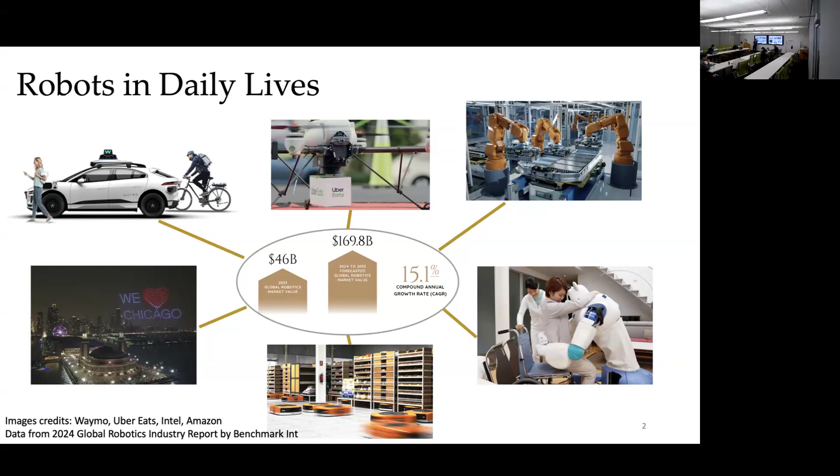And now with robots being increasingly integrated into both our lives and industries, we're really expecting high on responsible robotics, meaning the robots should not only do their jobs efficiently, but should also be capable of making decisions that are safe, reliable, and ethically sound. However, before achieving this grand goal, a critical challenge right now is how can we ensure robots stay safe at the very least in physical terms? After all, how can we trust a self-driving car if it's capable of leading us into danger, right?

And with incidents involving robot workers and autonomous systems on the rise, this has become an increasingly concerning issue. So action has been taken. Agencies like the Occupational Safety and Health Administration have issued guidelines on robot safety, emphasizing measurable and quantifiable robot safety standards. However, safety must not come at the cost of being overly conservative.

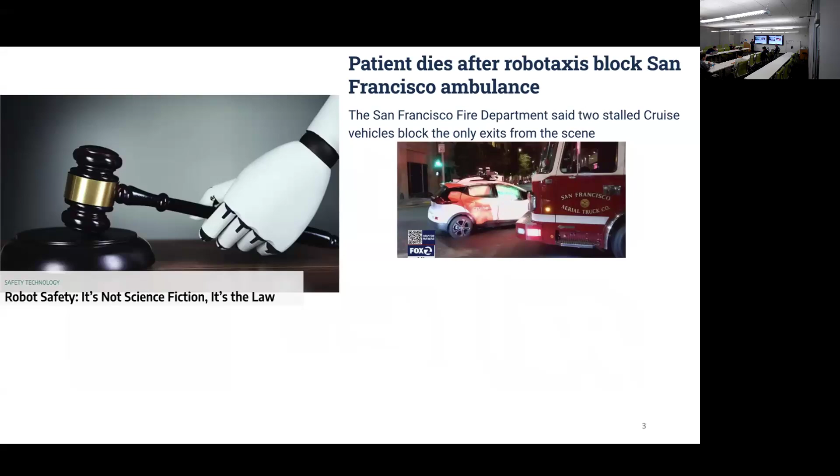So in August 2023, two autonomous vehicles blocked an ambulance from leaving the crash site, delaying the transport of the patient and tragically leading to their death. So this incident is telling us that robotic systems today are not fully equipped to handle these real-world complex situations where safety and flexibility must coexist. And what's even more concerning is that these incidents, although statistically rare, are already starting to cause public fear of robots, and people will stop using robots if this continues, no matter how innovative or efficient they become.

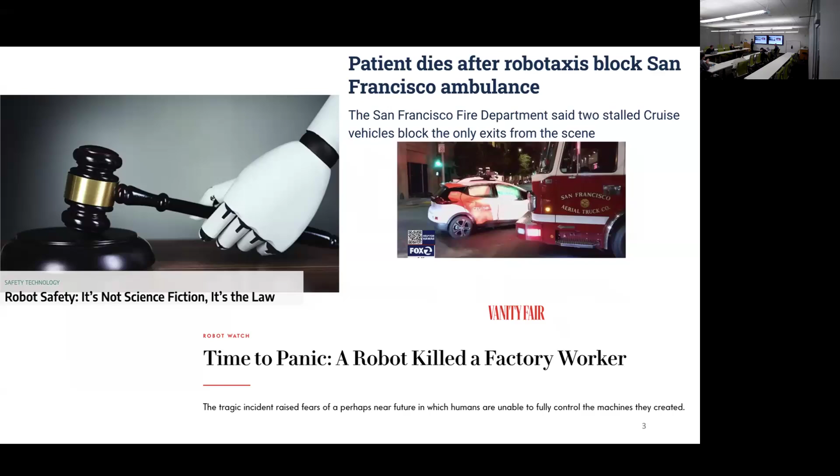So before we explain why it's so hard for safety and flexibility to coexist, let's first look at some challenges for robots to stay safe in this physical world. So in general, robots observe the environment and make predictions about how things will unfold in the future. And these predictions lead to specifications, for example, telling us how far the robot should keep itself away from the object. And then during this decision-making process, the robot will decide what actions to take, either individually or collaboratively with their human or robot teammates.

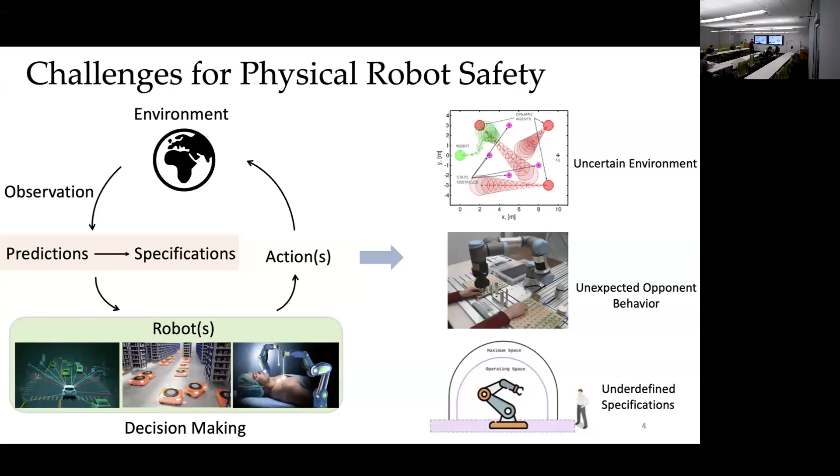So this process may seem straightforward, but when it comes to real-world applications, it's far more complicated, as robots may face potential sensor failures, unexpected changes in the environment, or unpredictable actions from other agents. So my research aims to address this grand challenge of physical robot safety. And I'll discuss how we can use methods from control theory, machine learning, and social science to investigate it from three different perspectives: the environments the robots operate in, the counterparts they're interacting with, and also the safety specifications they're following. And this brings us to the outline of today's talk.

So in the first chapter, we'll talk about functional safety, targeting robots operating in uncertain environments, especially if they're suffering from localization error or motion disturbance. And I'll present a control-theoretic framework that provides mathematical foundations for guaranteeing safety in a probabilistic setting. And more importantly, we want this to be done without having robots behave over-conservatively.

And second, building on top of this, together we'll explore the challenge of collaborative safety, where robots have to collaborate with their heterogeneous teammates in a decentralized setting. And I will show how we can use novel responsibility reasoning combined with control-theoretic methods to allow agents to make context-aware decisions that lead to group intelligence with formal safety assurance.

And then in the last chapter, on representational safety, we'll talk about how we can generalize these methods to unseen scenarios where the safety specifications are not known beforehand and have to be learned. For example, when a robot enters a new environment, how should it determine the best safety distance to follow? And I will discuss how we can blend data-driven learning with control-theoretic techniques to answer the question of how safe is safe, allowing robots to adapt and refine their constraints in real time.

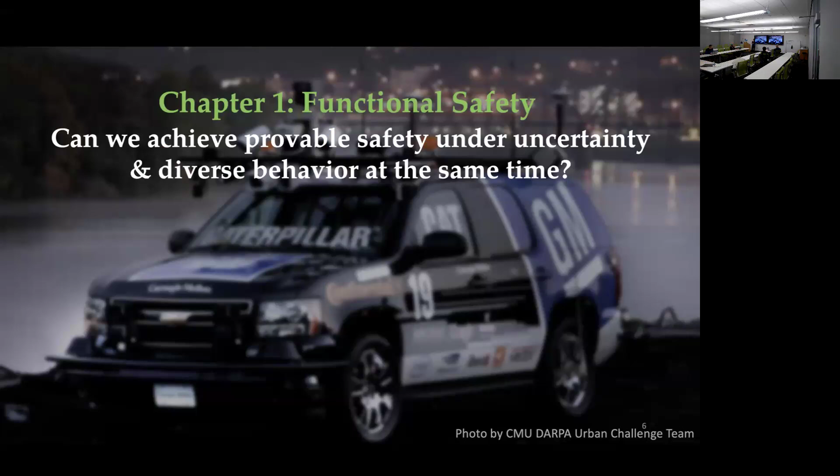So the general idea of safe control is that given a system model that tells us how the robot positions and the velocities are going to change if certain actions are taken, and also given safety specifications that tell us, for example, how far the robot should be away from others, right? And this describes which states are safe for the robot to stay in. Then we use control theory to select actions to keep the system in those safe states.

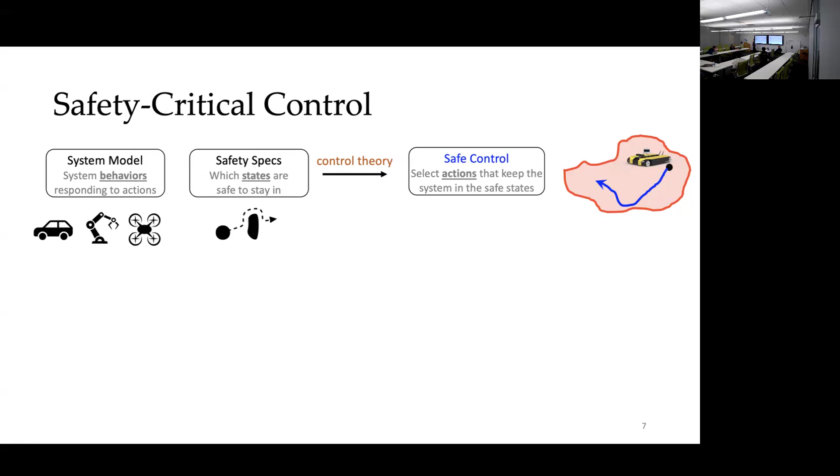And some common strategies to do that are partitioning the joint state space into small tessellations, or we can impose velocity constraints based on geometry and motion, or analyze all potential future states given robot dynamics. Is this the state space of only our robot, or a state space that includes the dynamics of the environment? This is a state of only robots. Okay.

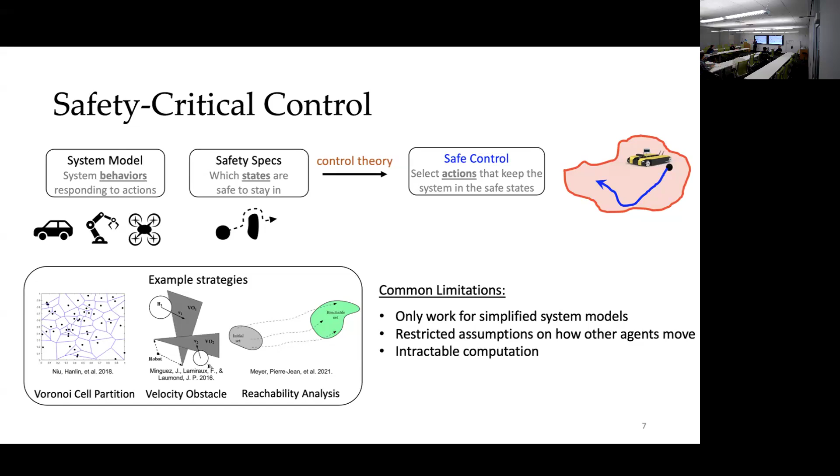However, these common strategies usually suffer from limitations, for example, difficulty in handling complex system dynamics, or over-reliance on restrictive assumptions about how others will move, or they could easily become computationally intensive at runtime. So at the same time, control barrier function has become a practical, popular solution due to its generality and ease of use. And here's an overview of how it works.

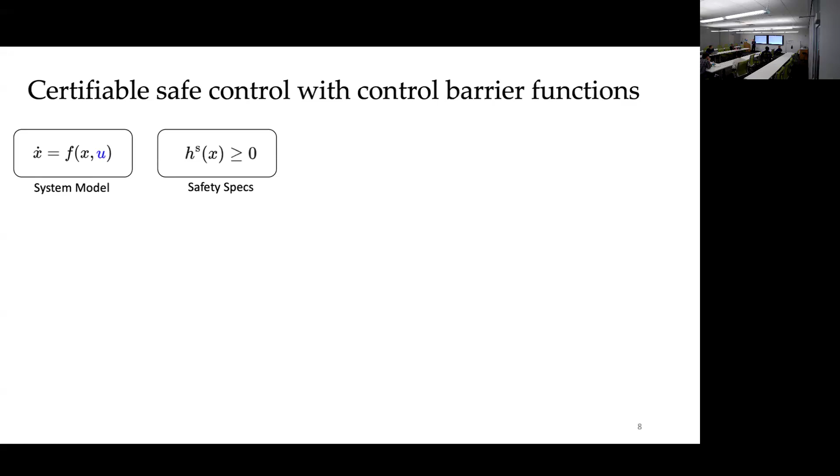So given a system model like this, where X represents the state of the robot, for example, the position where it is, right? And U is our control input to the robot, for example, the accelerations. Then control barrier function is essentially describing a set of states denoted by H(x) greater than or equal to 0, where the H function is characterizing how far the robot is away from the boundary of the safe set.

So just like in this illustration here, the red safety boundary is separating those safe states with positive H values from unsafe ones. And the control barrier function is essentially saying if the robot starts initially in this set, then it will always remain within the set. So how can this be done?

So we do this by imposing such a condition on robot motion to describe what kind of actions are actually allowed or acceptable based on how we would like this H function to change. And here we're strictly enforcing that the rate of change of this H function with respect to time has to be lower bounded by negative gamma H, where gamma is a positive behavior coefficient.

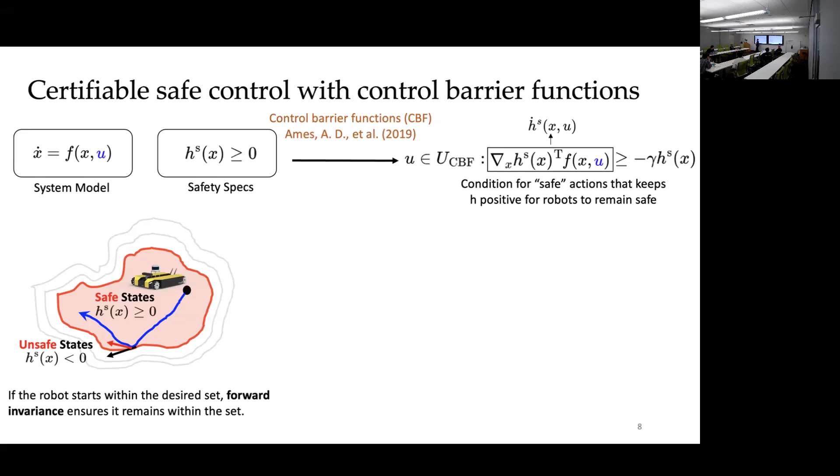Now, how is this related to provable guarantees? Let's look at this visualization here. So we have this blue line here describing how we would like this H function to evolve over time. And at the same time, we have this green line. It is an exponential function serving as our baseline function.

So the key idea here is as long as we can make sure the decaying rate of this blue line is not faster than this green line, the blue line will always stay above and therefore keep the positive value for the H function. Correspondingly, the robot will always stay within this safe set. So we can see CBF is quite a powerful tool as it can translate our safety requirement from the state space into a constraint in the robot action space. So that's why people use CBF a lot to get these provable guarantees.

However, it also has some limitations. The first one is that it often assumes perfect system models, system dynamics. So what would happen if uncertainty, for example, unbounded motion noise, is introduced? Can we robustly account for these uncertainties while still preserving these provable guarantees?

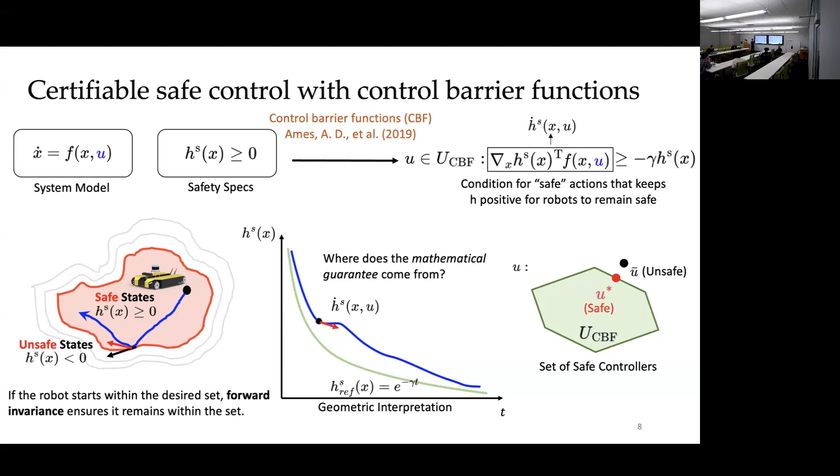And second, think about the cases where the robots are blocking the road due to their limited behavior characterization, right? So the question here is, can we make the safety analysis adaptive so that we can maximize the robot flexibility in motion when it comes to near-accident situations, right? So they don't have to behave overly conservatively.

So to address these two challenges, we propose to extend the conventional CBF into a probabilistic setting. Let's take this ramp merging as an example, where our ego vehicle needs to safely and efficiently merge with this human-driven car here.

And instead of having a deterministic model, now we are having a stochastic one with this additional term d capturing the uncertainty modeled as Gaussian motion noise. And on the upper right, we have this loosely defined probabilistic CBF safety condition. And unlike those traditional CBFs that rely on a fixed behavior parameter gamma, we are formulating it as a bi-level optimization problem where the robot control as well as the behavior parameter gamma are being involved.

Now you may wonder, why do we want to do that, right? How can this help us to address those two challenges we mentioned earlier? So recall the exponential functions we mentioned earlier. The gamma value is essentially describing how fast a robot or system is allowed to approach the boundary of the safe set. So by taking different values of gamma, we are essentially choosing different exponential functions to bound our decaying rate of the H function here.

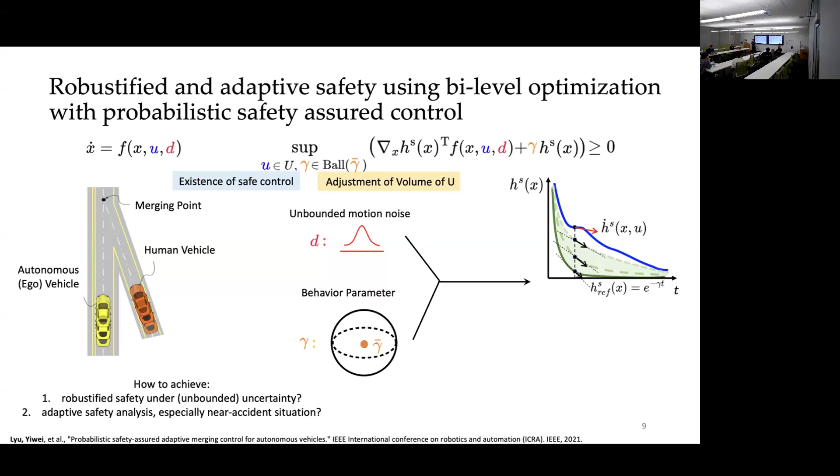And in the context of driving, this gamma can also be interpreted as driving styles. For example, whether a robot is typically a conservative driver or it is typically an aggressive driver. And our key insight here is when it comes to near accident situations, actions that do not follow your typical driving styles may be needed.

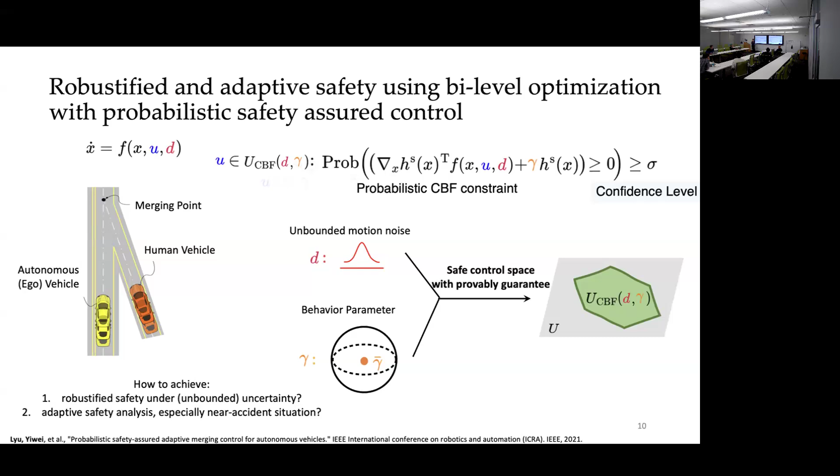And here is our formalized representation of this probabilistic CBF constraint, stating that this condition has to be met with at least probability of sigma. And this kind of formulation allows the robot to robustly account for uncertainties while dynamically adjusting its driving behavior style to balance between safety and flexibility.

And traditionally, if we want to do that, we need to specify very detailed goals. For example, which gap should the robot merge into? And after that, once you specify this goal, you will need to construct corresponding reward functions or use a high-level planner to do that. Now, with our approach, these diverse behaviors naturally emerge from the same objective function. And this is because the safe control space for each robot is being automatically calibrated based on the different driving styles they are adopting. And these different behaviors align well with our real-world applications.

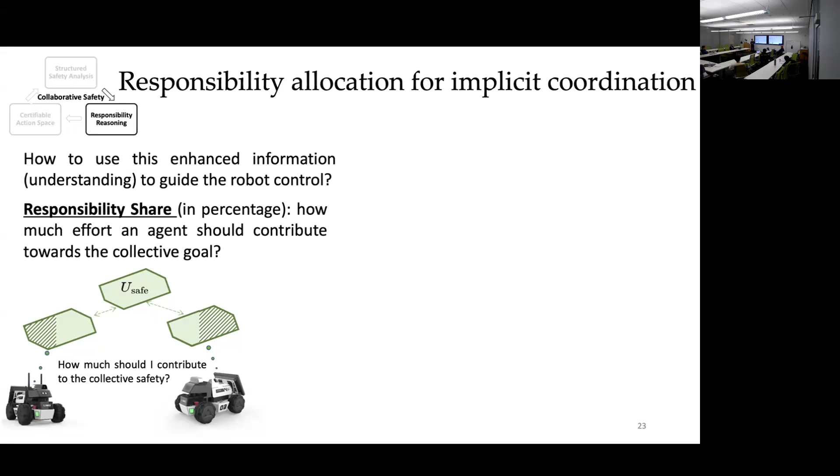So that's how the red agent decided to take on more responsibilities on its own. Now the question becomes, okay, we have these responsibility shares. Now how are we going to inform robot control, right?

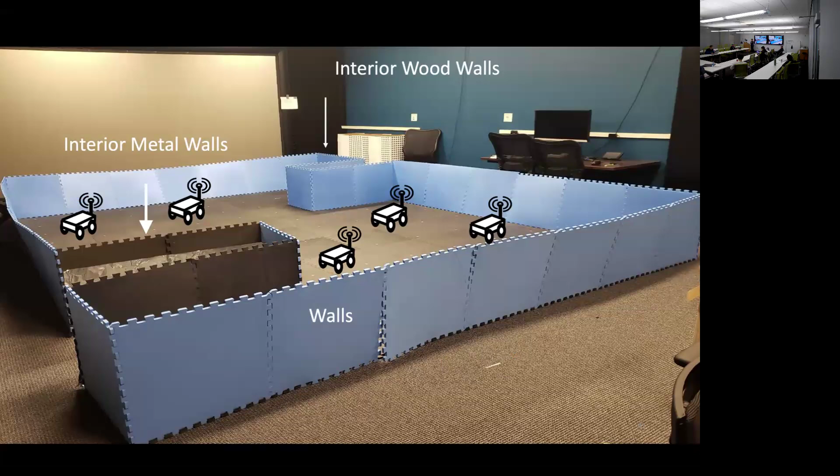So to answer these questions, we start from collecting some real-world data. This is how we resemble a typical indoor space. By using materials like foils and wooden boards, we are simulating the existence of interior metal walls and wood walls, which are common factors that can influence communication quality. On the right, we are looking at a visualization of how this communication quality could vary over space. This is measured by a metric called RSSI, received signal strength indicator, to quantify the Wi-Fi signal strength at different locations.

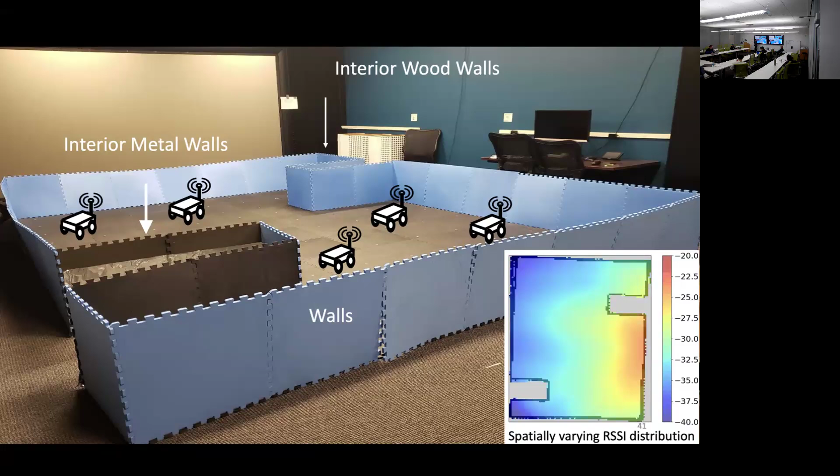Now, with this data, including robot positions as well as the measured signal strength, let's see how we can learn the constraints as well as their compositions from this data. So we start from building a predictive model using Gaussian process to estimate the communication quality around each robot. And then from this predictive model, we define a region with acceptable communication range, basically representing within this area, we can receive acceptable communication quality.

And then we formalize this region description through connectivity barrier certificate, which basically translates the communication requirement from the state space into robot control space. In other words, for this pairwise robot i and j, as long as we can find a joint control that falls within this part of this set, then this pairwise robot is guaranteed to stay connected.

Now, with connectivity barrier certificate serving as our pairwise and modularized constraint, our next question here is, in this mobile robot system, how should we determine which subset of the constraints to activate? And at the same time, we want to minimize the unnecessary constraints on robot motion so that they can complete their tasks efficiently. So we do this through graph-theoretic optimization, which can help us compose all these different pairwise constraints into a unified framework. And through this process, we can ensure that the robot team stays connected as a whole while maximizing their flexibility in motion to reach their target.

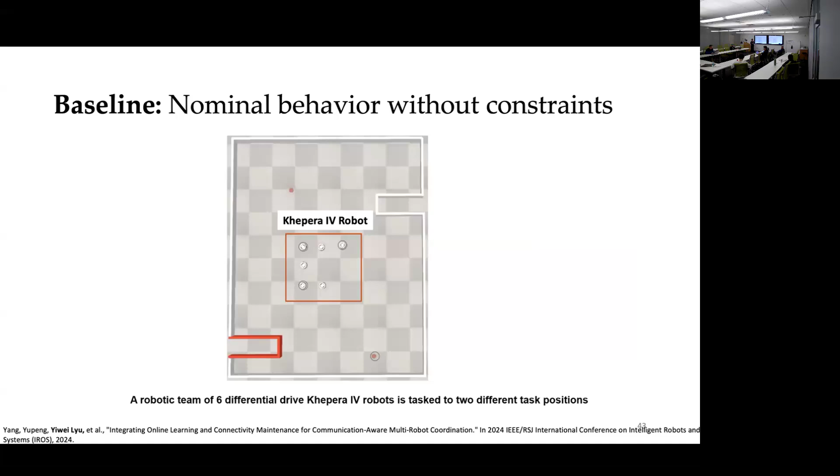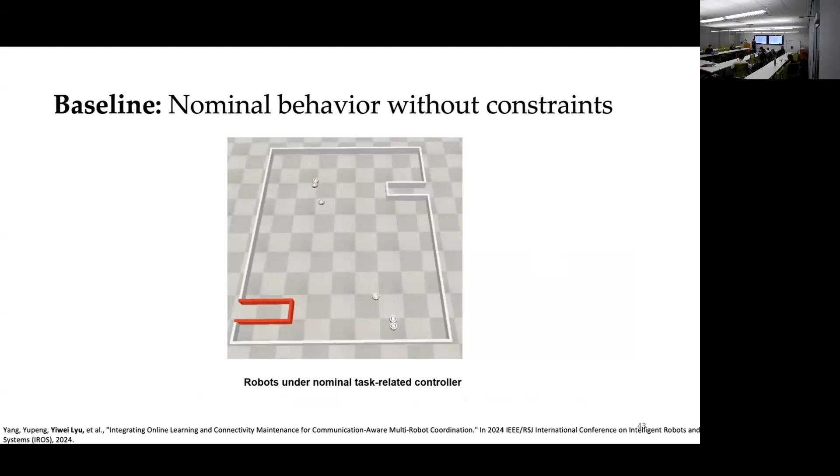So basically, we have 6 differential drive robots divided into 2 subteams, and they need to reach their goal locations separately. And now with this baseline version, we are not enforcing any constraints. So we observe that collision happens, and also the robot team loses connectivity. Now with our approach, we can see that the robots can actually reach their goal locations effectively while staying connected and safe over the entire time.

And on the right, you're looking at a visualization of how the communication constraints are being established within this multi-robot team. All these different dots are representing the agents where the robots are, and the links here represent the communication constraint being established between a pairwise robot. Now you will see two changes. The first change is in the length of the link over time. And this is because pairwise robots are actually adapting their communication constraints based on the received signal strengths they are receiving at those particular locations.

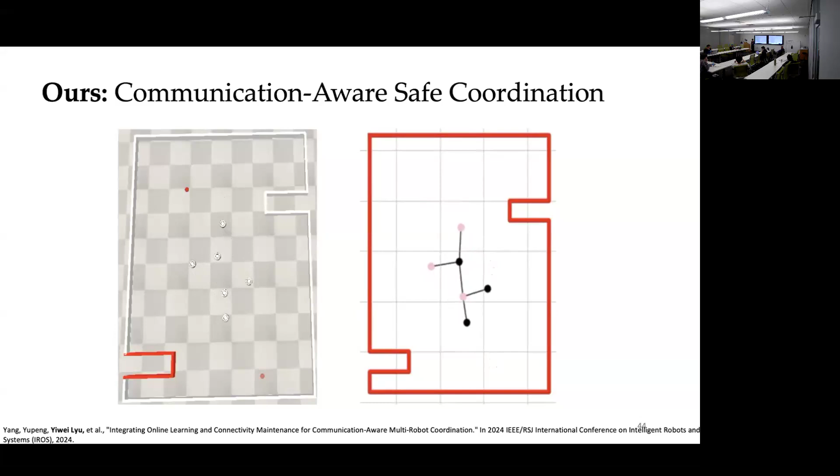And second, you will see a change in the way these links are being connected. And that's because during this process, we're dynamically choosing or composing different pairwise constraints together to meet this high-level specification saying this robot team has to stay connected. So the key takeaway here is when we are talking about evolving tasks and environments, the co-design between robot control and specification is really important. And second, when we are facing underdefined specifications, this might be effectively addressed if we can integrate data-driven learning together with control-theoretic techniques.

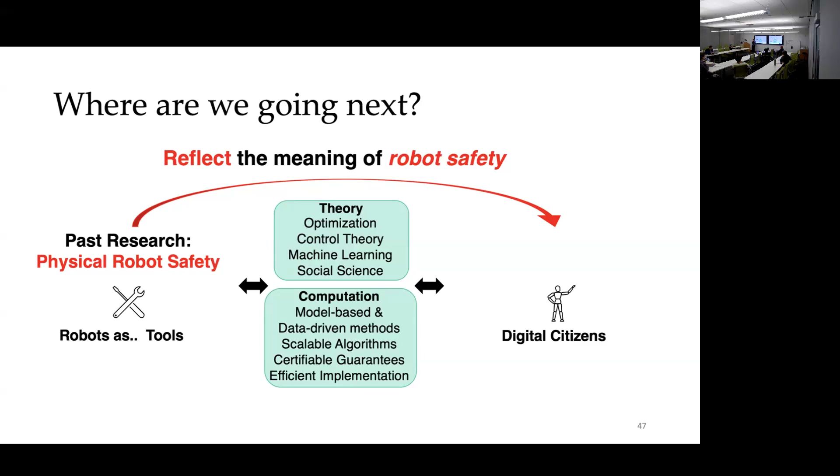Okay, so as a summary, today we have talked about how a robot should act either individually or as part of a group under uncertainty, and how we can generalize this method to unseen scenarios where safety specifications are not known beforehand and have to be learned from data. Now, where are we going next? The one important question that is driving my research is, considering robots transitioning from being tools to digital citizens in our human society, how can we better reflect the definition of robot safety? And to me, it means that we should not only pay attention to robot safety in the physical space, but also pay attention to the long-term societal impact.

So what does that mean? The first direction I would like to propose is called human perceived safety, with a focus on trustworthy behavior synthesis. So imagine you're driving on the road, and if you see a self-driving car crazily weaving through traffic like this, although it's technically safe, there's no collision, you don't want to be anywhere close to it. So the question here is how can we capture these considerations and incorporate them into robot decision-making so that we can better align robot behavior with human values and perceptions? This is the challenge I want to tackle.

And then the second question is about ethical robot safety. So the key idea is that I want to give robots the ability to think critically about what is right. So rightness might be described by a lot of things. It could be moral standards, it could be social norms.

And this will be especially important when robots are trying to navigate in complex situations where there might be conflicting values. For example, as a car driving on the road, you should follow traffic rules. But if you're an ambulance on active duty, you should know when to break the rules to save lives. So the key challenge here is how can we enable context-aware ethical reasoning to determine which set of norms should be applied based on the context we are talking about, and how can we balance between conflicting values during execution.

And then the third direction is about legal robot safety. So this is a new area that is currently quite underexplored, and the key idea here is I want to extend the responsibility reasoning in my current research, which answers the question of what the robot should do to avoid collision, to liability reasoning in the legal context, to answer the question: given the accident has already happened, is there anything that you could have done better?